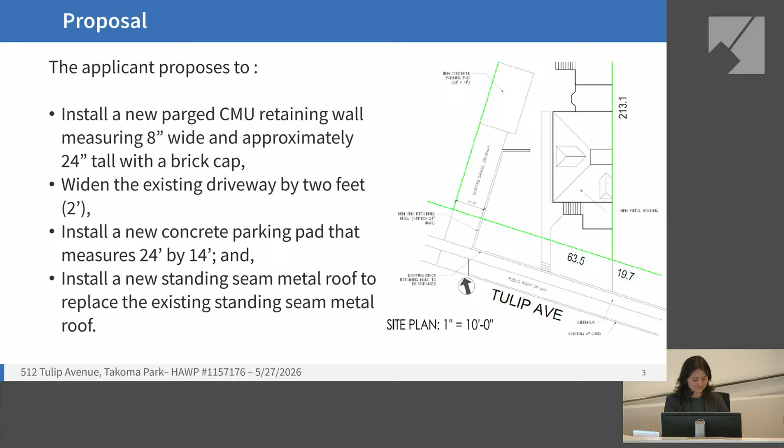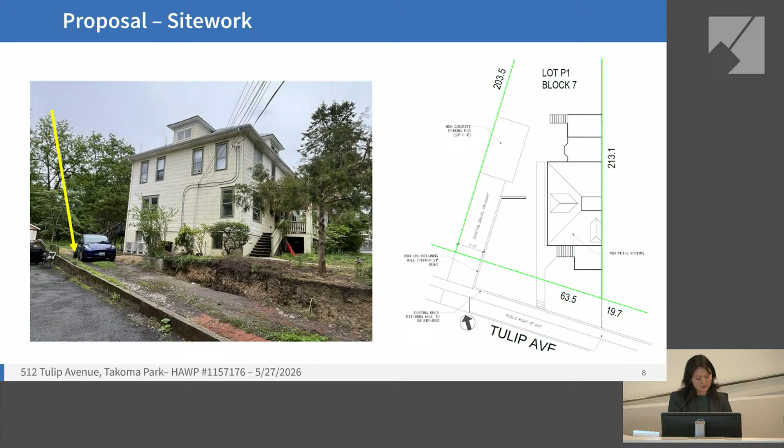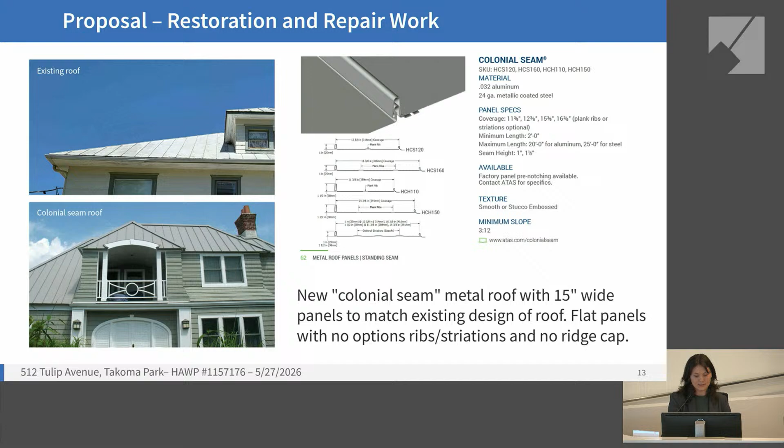The applicant also included some in-kind replacement and repair work as part of this application. They are proposing to remove the existing standing seam metal roof on their half of the duplex, as seen in the photo on the top left, and install a new standing seam metal roof. The existing roof has 15-inch wide flat panels with 1-inch tall standing seams, and the proposed roof will have 15-inch wide panels with 1-inch to 1.5-inch standing seams. There'll be no optional rib striations and no ridge cap.

Staff notes that the HPC does not typically review in-kind replacements or repair work. This work is not typically subject to HPC review per section 24A6, and that language is just up here. Homeowners are permitted to perform ordinary maintenance and in-kind repairs, although staff does appreciate the submission of specifications in advance to confirm that the proposed materials accurately reflect the nature, texture, dimensions, and details of the building materials as outlined in 24A 040101. Staff notes that this work is also eligible for the Montgomery County Historic Preservation Tax Credit.

Staff finds that the proposed site work is compatible with the character of the district per 24A8B and the guidelines. The hardscaping alterations respect the existing environmental setting and pattern of open space per the guidelines. Many of the driveways in the district and along this block contain wide private or shared driveways similar to the proposal. The retaining walls along this block are a mix of many materials,

and staff finds that the proposed concrete and brick retaining wall is generally compatible with the character of the resource and the streetscape. Staff finds that the new parking pad is also compatible and will not have a meaningful impact on the district, particularly given its setback from the street.

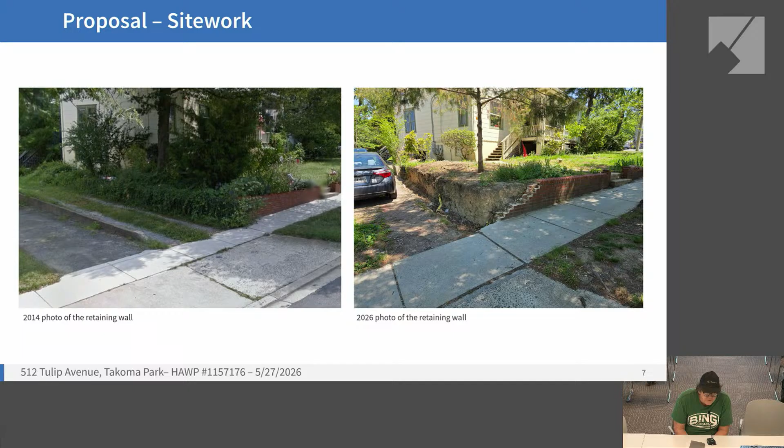I think maybe they'll be wanting to do permeable pavers. We could certainly ask them that, but I think they've made an attempt to mitigate stormwater. You're talking about 400 feet of concrete on a very small lot. Yeah, well, there are a lot larger driveways in the neighborhood. You just walk down the street, they're much wider driveways. So I think it's a reasonable request, and we can certainly ask if permeable pavers would be suitable for them.

In terms of the retaining wall, I think that's an engineering, a reinforced, 8-inch reinforced wall. It's not a very tall wall. Would certainly be capable of retaining that earth. I would not be so concerned about the brickwork, as there's probably suppliers that can, if they don't have the brick, find a very close match. I've done it many times as an architect.

How many cubes of brick have you laid, sir? Well, I can't say that I've laid cubes of brick, but that's not the point. The point is I've matched 50-year-old brick pretty darn close. So I think as long as they can find the brick that's in the right size and texture and color, they should be able to rebuild that successfully.

Sure. Go ahead. Commissioner Galway. Yeah, this is Commissioner Galway. First of all, thank you for your testimony. I think we have to be very careful, being a historic area work permit, and a lot of the things that you brought up, the lead, the concern with permeability, the ability to create that wall and how that was done, most of those things are not in our purview.

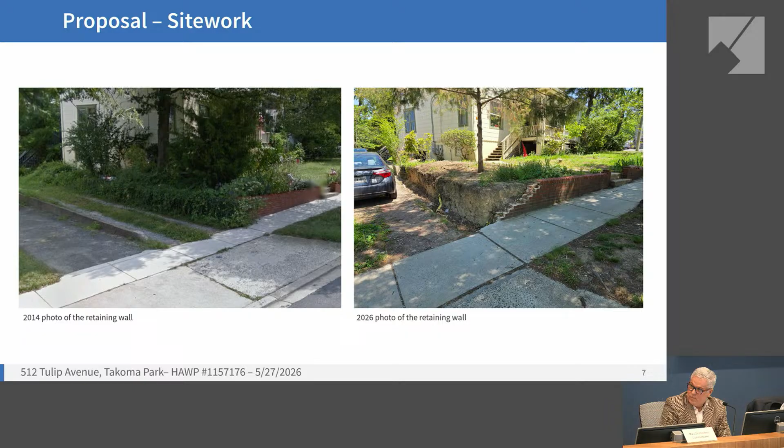If not, we appreciate your coming in and talking to us. Thank you. We'll certainly talk to staff about how we advertise our applications in the future and assure that neighbors are receiving the advertisements.

I can't address the roof issue because I don't have knowledge of the components of the roof. I haven't been up there, so I can't claim to know if there's lead or not. I would assume the permit process would require them to illustrate if there is lead, and how they'd abate it when they remove the roof material.

Does Montgomery County require a permit for replacing a roof in kind? This is Rebecca Ballo with the staff. Again, the Department of Permitting Services requirements are separate from the purview of the Historic Preservation Commission. We can certainly give you the website for DPS if you have questions about what other permits might be required for this submission. Again, sir, I can't answer that question, I don't work for the Department of Permitting Services, and neither does the commission. So I would direct you to their website if you have questions about other permits required for this work. Very well, thank you.

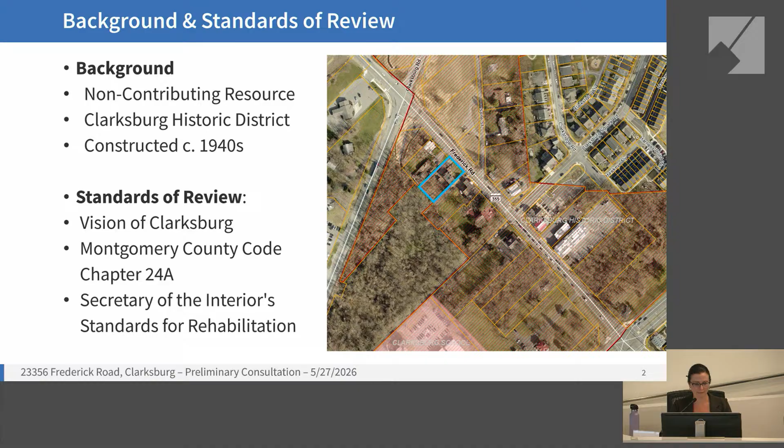This is a preliminary consultation review for 23356 Frederick Road, Clarksburg. The property features a circa 1940s Cape Cod house and is listed as a non-contributing resource in the Clarksburg Historic District. The project is subject to review under the Vision of Clarksburg, Chapter 24A of the Montgomery County Code, and the Secretary of the Interior Standards for Rehabilitation.

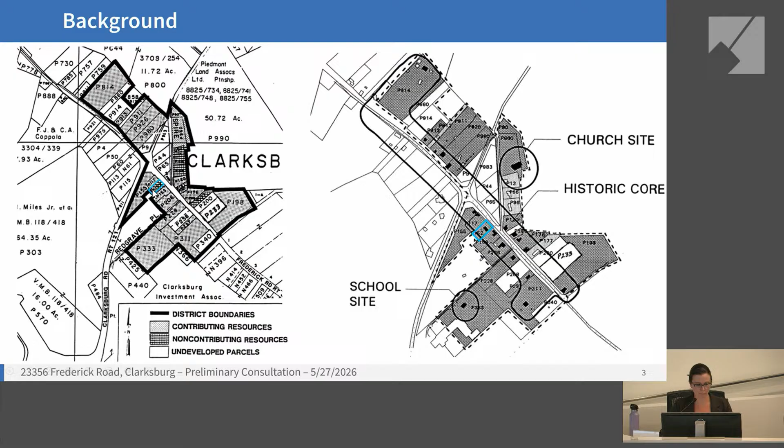The property is located in the historic core of the district between Spire Street and Clarksburg Road. A few existing conditions photos of the property: the existing house appears as 1.5 stories from the front and 2.5 stories from the rear, owing to changes in grade, which falls both from left to right when viewing the property from the front, and front to back along the property. For this preliminary consultation, the applicants seek feedback on a proposal that would ostensibly function as infill construction in the district.

The applicants propose to substantially demolish the existing structure, maintaining portions of the rear and side walls, extend the foundation and building footprint forward approximately 12 feet, and construct a 2-story addition with an elevated and occupied basement level. This would result in a building that is 44 feet 9 inches wide by 40 feet deep, with a total height of approximately 41 feet from the lower level to the roof peak.

The upper floors of the building would provide multifamily housing, while the lower level would be occupied by a commercial space. As part of the redevelopment of the site, the applicants also proposed to demolish an existing garage or shed building and to create a 20-foot wide paved driveway leading to a rear parking area, behind which would be located a new bioretention pond and associated stormwater management facilities.

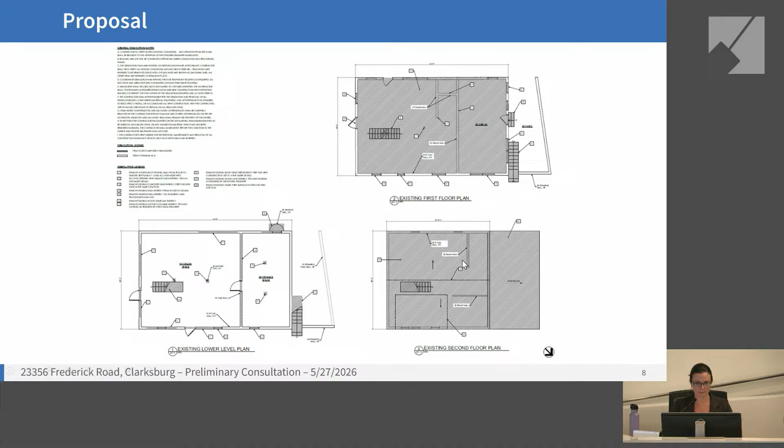Here's the proposed site plan showing the proposed footprint and site work in relationship to the neighboring historic properties. A more detailed site plan, existing floor plans with the demolition work shaded in gray.

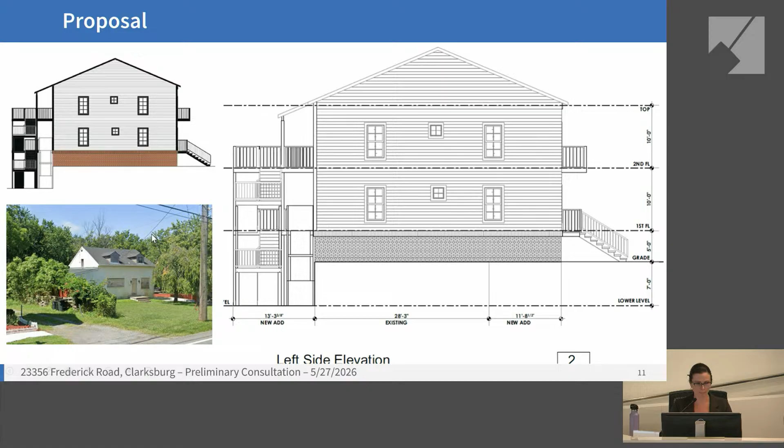Proposed first and second floor plans, proposed front elevation, the left or southeast side elevation drawing and rendering, and an existing condition photo from the public right-of-way. The right or northwest side elevation and existing condition photo from the driveway, and the existing rear elevation photo and proposed rear elevation drawings.

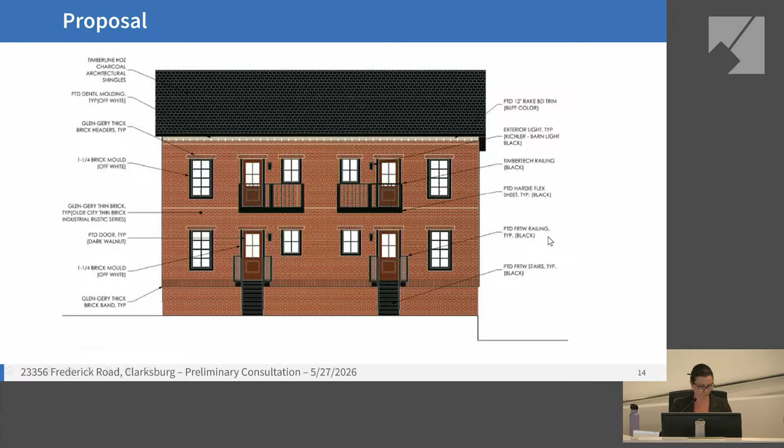Again, the front elevation and a bird's eye view of the property for some context. And from street level, the existing house is set back here.

Staff supports the overall concept of the proposal, namely the substantial demolition of the non-contributing resource and construction for new infill housing and commercial, but recommends substantial changes to the project design.

As a non-contributing resource, staff finds that the substantial alteration or complete demolition of the existing house and shed does not remove historic materials that characterize the property, in keeping with Standards 2 and 9, and Chapter 24A8B1 and D.

Staff further finds that the overall expanded building footprint of 44 feet 9 inches wide by 40 feet deep and resulting building setbacks are consistent with the footprint and setbacks of buildings in the Clarksburg Historic District. Staff finds that the proposed setback of 26 to 32 feet from the public right-of-way is consistent with or greater than neighboring historic properties.

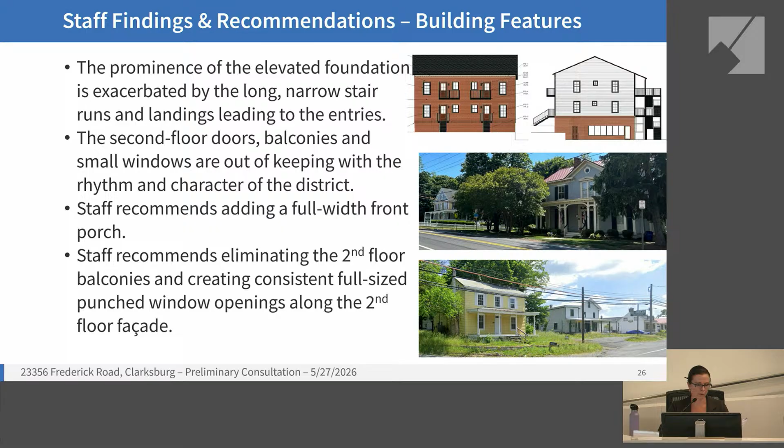Regarding materials, per the vision, the dominant building material in Clarksburg is wood clapboard or weatherboard. Staff finds the proposed thin brick cladding of the front facade is incompatible with the district and recommends that the front elevation above the foundation level be clad in horizontal wood or fiber cement lap siding, such as the Hardie lap siding proposed on the side elevations.

Staff also finds the amount of uninterrupted siding on the side elevations is out of keeping with the character of the district, and recommends the side gable ends be differentiated through a material change, use of a bandboard, or installation of gable end windows or louvered openings to reduce the amount of uninterrupted siding presented on the side elevations.

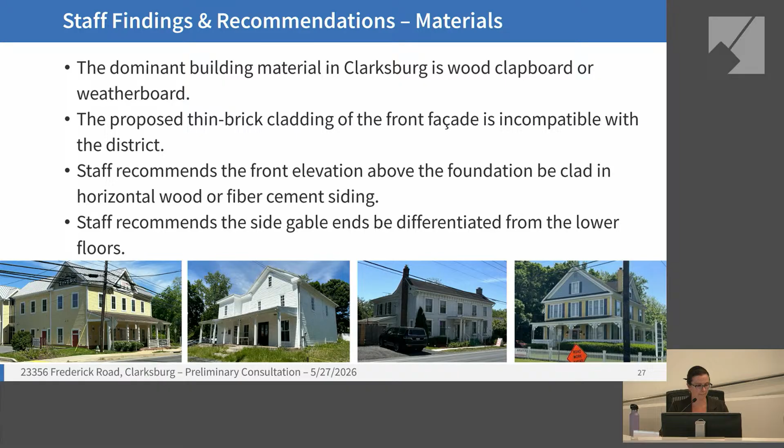Staff recommends that additional details regarding window and door reveals, trim details, and other features be submitted for a future preliminary consultation.

In addition to the building alterations, the applicants propose a new paved driveway with a parking area at the rear. New segmental block retaining walls would be added along the sides of the driveway owing to the changes in grade. Staff finds that while the proposal widens the existing driveway by a few feet, it does not introduce a new curb cut and will have a limited impact on the historic district, in keeping with Chapter 24A 8B1.

Staff finds that much of the proposed parking will be located behind the existing or proposed building, and that owing to the grade changes will be limited in view from the public right-of-way.

Staff notes that a proposed dumpster would be located at the end of the driveway before it turns behind the building for the parking area, and that this dumpster should be screened with fencing to be reviewed at the next preliminary consultation. Behind the parking at the rear of the parcel, the applicants propose to construct a new bioretention pond.

Staff finds that this area will have limited visibility from the public right-of-way, but seeks additional information on the requirements and associated landscaping. In summary, staff supports the overall project footprint, setbacks, and form, but finds that the project's height and architectural expression are incompatible with the requirements for the Clarksburg Historic District.

For this review, staff requests HPC feedback on the appropriateness of the scale, height, and massing of the proposed additions, the appropriateness of the proposed building design, the appropriateness of the proposed hardscaping and site work, and any other comments you might have.

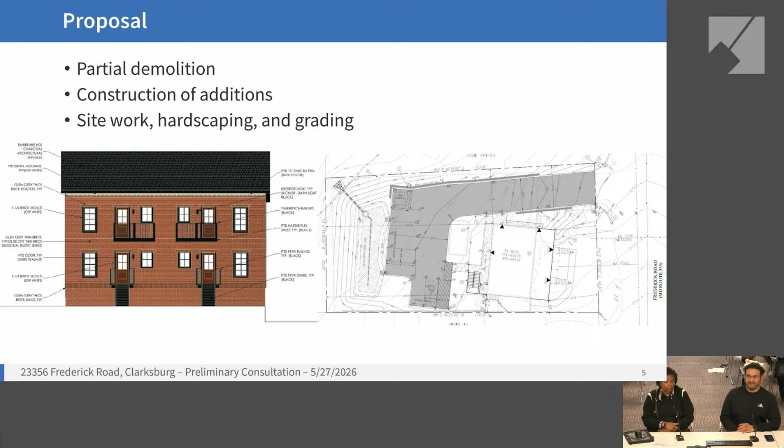Thank you so much for reviewing everything. I do have a question.

So we spoke with Laura in regards to adding a front porch across the facade. If a porch was introduced, would that give us any leniency for the height? Because now it would propose a presence that looks similar to the other buildings, even though it'll be a bit taller. Could we meet in the middle of that 30 foot 10 inches if a left to right porch was presented? Or are we hard on the 30 foot 10?

I only ask, I mean, we can bring some down for the lower level, but we would be confined to 8 foot ceilings in these apartments, and most apartments nowadays have taller ceilings than 8 foot. So we're trying to be in kind with what people would be interested in, which is why we increased the heights.

To add to that point, I think another part to consider is that the commercial space is pretty much on the back of the property. The entrance doesn't fall on the front of the road at all, so everything is on the back.

So when I checked with the county about the building height, that should not impact things, because it also impacts the operation of how the commercial space is going to be used if I reduce the height by a significant amount. We've done a lot of math and consultation before approaching this. I wasn't aware, but pretty much the bottom line is that as long as we stay within the height limits the county allows, we should be okay. That was the guidance we were following.

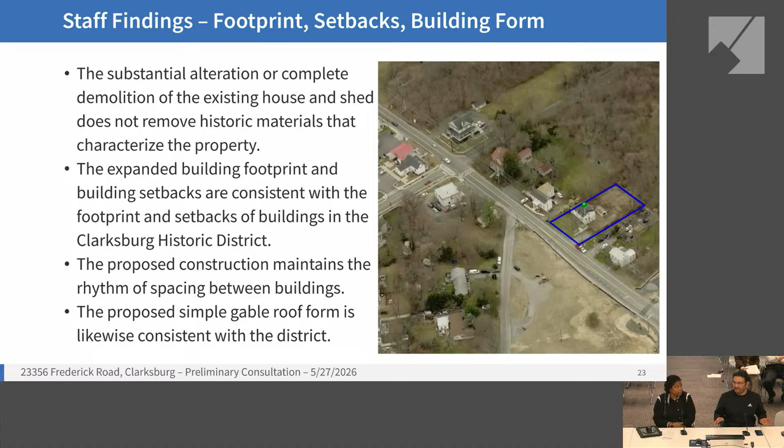There's a next door cafe called K2 Cafe, a gas station, and a tavern - three restaurants nearby. So we are going to comply with the historic district or conservation area requirements and not advertise too big. It's going to be a very cozy, community kind of environment.

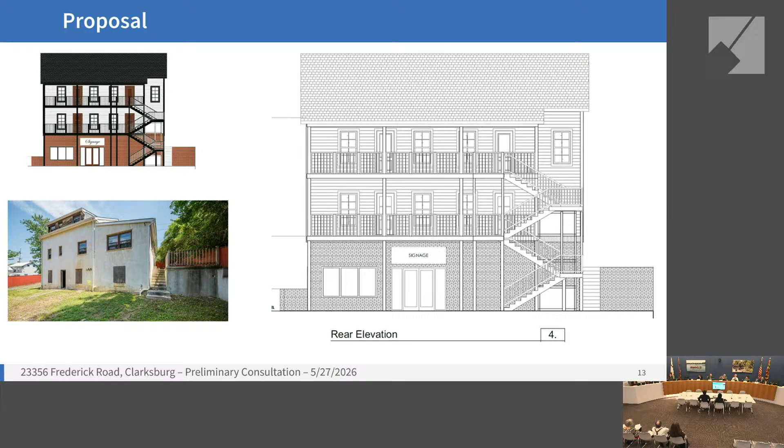That's what we are trying to create there. Okay, so we need information for that for next time. Would they have to apply for a separate HAWP for signage? This is Rebecca Ballo for the record - yes, they would have to apply for another HAWP for signage.

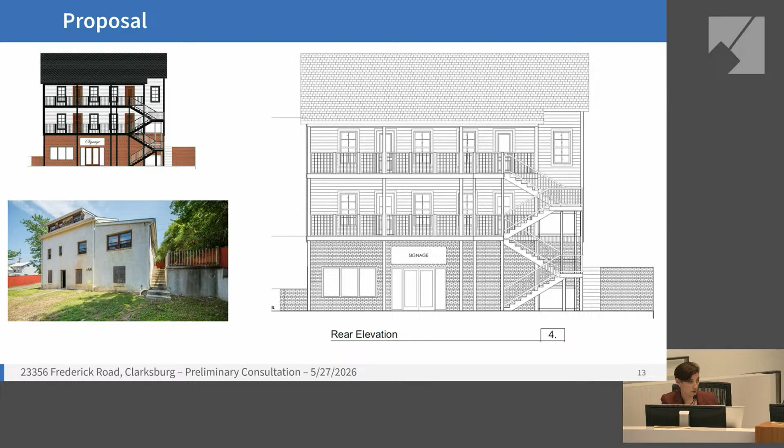Just for the commissioner's information, some of the images Laura showed in the presentation are also commercial buildings within the historic district. There are many commercial establishments within Clarksburg easily accommodated within the historic district design guidelines, and we don't regulate use per se. What we regulate is architectural compatibility, and that comes first - the use can't drive something architecturally incompatible. We don't have basement level commercial uses within the district, probably because they're challenging spaces to market and use, but we have very successful commercial spaces that exist typically on the first floor. So they would need a separate HAWP for any signage, just like other commercial buildings do.

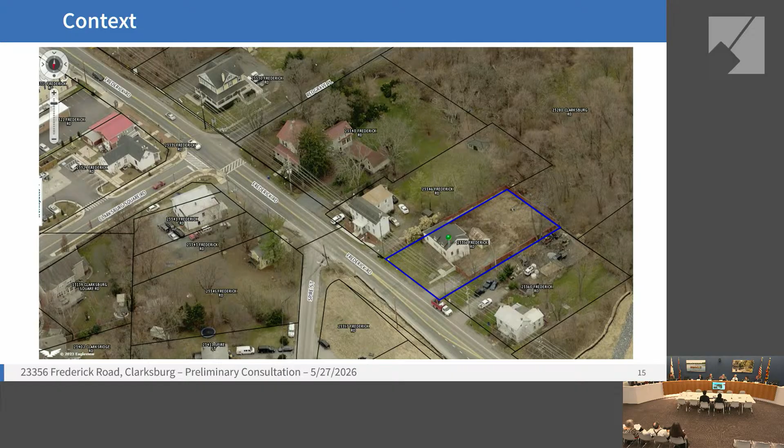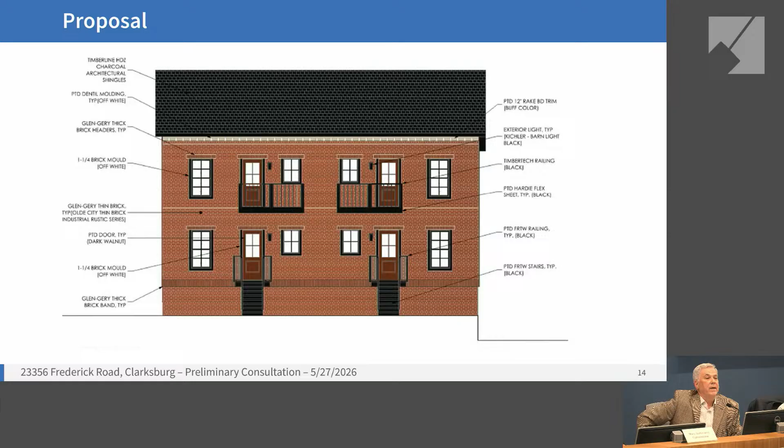Thank you for that. Other thoughts? I have one - the photos seem to suggest the grade is sloping down from the street to the back of the property. So why can't you just lower the building down, excavate, push that dirt downhill, and put a nice level terrace out there for your coffee?

No, that would also create a subdivision process altogether. The moment I start hitting the boundaries and go above a certain threshold, like trying to open anything beyond the existing 1,900 square feet of building, I would have to get into a subdivision or record platting process, which is about 2 years long. We've already wasted 1.5 years sitting on this property without any concrete movement, so that's why we are not planning to do that.

So you don't want to do stormwater management? No, we are doing stormwater management. I kind of didn't catch the reason why you can't lower the grade - I didn't understand, sorry.

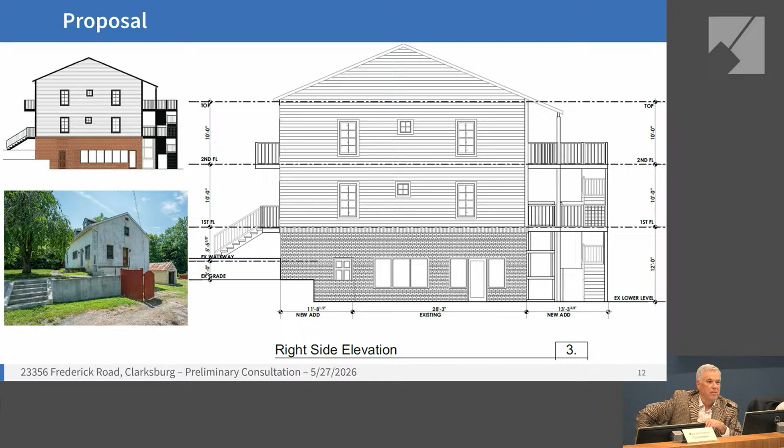This is Rebecca Ballo again for the record. The lot is unplatted. So the reason, for example, that the applicant is not demolishing the entire building and starting new is because if they were to do that, they would have to plat the lot and go through an administrative subdivision process with the planning board. There are a lot of additional requirements that come with that, so they're creatively approaching this so they do not have to plat the lot.

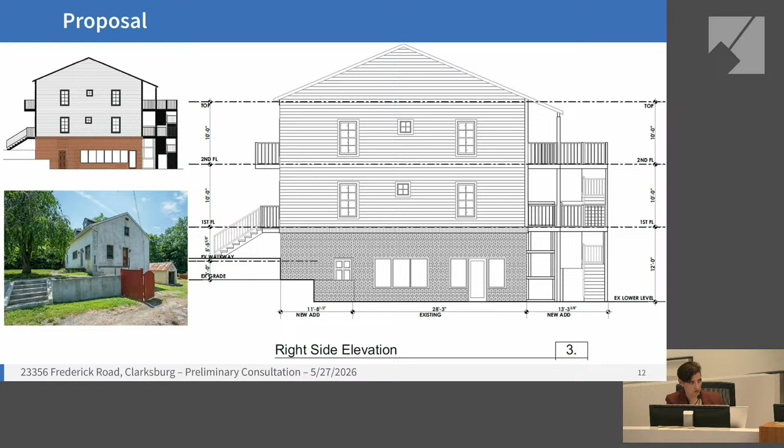Got it - so there's nothing in terms of site restrictions, it's the administrative burden they're trying to avoid, is my understanding. Yes, that is correct. Okay, thank you, got it. Thank you very much for that explanation.

Any other questions? Commissioner Dominiani, I have another question for you. I'll invite you for lunch for sure, once I'm ready with the cafe.

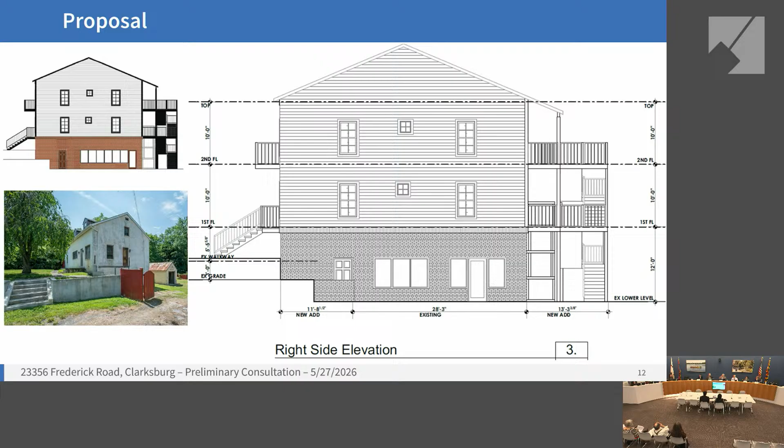This is a question about the front of the building. You've heard comments about this, and we're going to go into a broader deliberation about front porches and things like that. But in the drawings, it wasn't clear how you might be connecting that building, the front entrances, the sidewalk, the front stairs to the street, if at all. I know some of your neighbors have smaller front porches closer to the road, connected directly even to parking along Frederick Road. So the drawing didn't show that to me - I was hoping you could describe, if the drawing's not accurate, how you planned it.

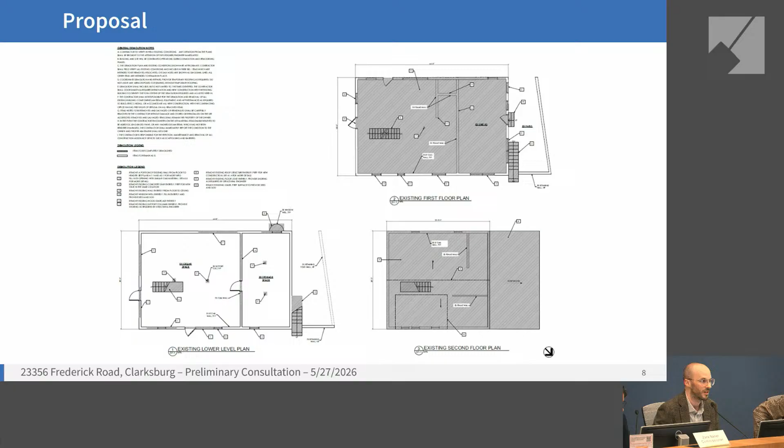Yes, the current lot - the property is way behind the current front road. All the properties on this line are pretty much very adjacent to the main road, like around 8 to 10 feet.

This property is unfortunately set back around 40 feet already. So even if we bring a 12-foot front, we still have around 30 feet of space over there, which is more than sufficient.

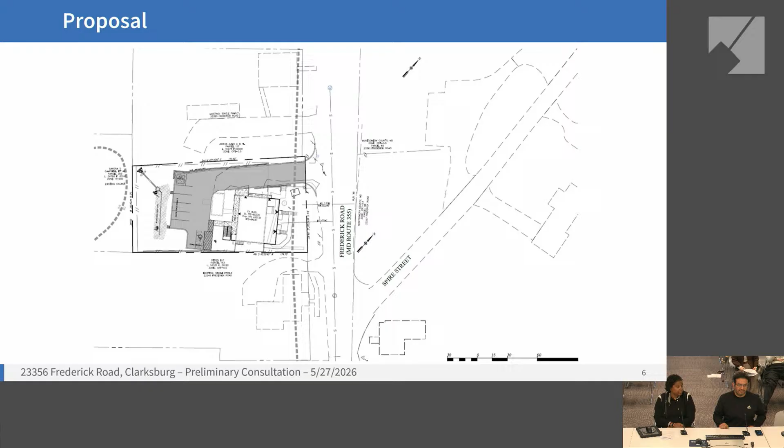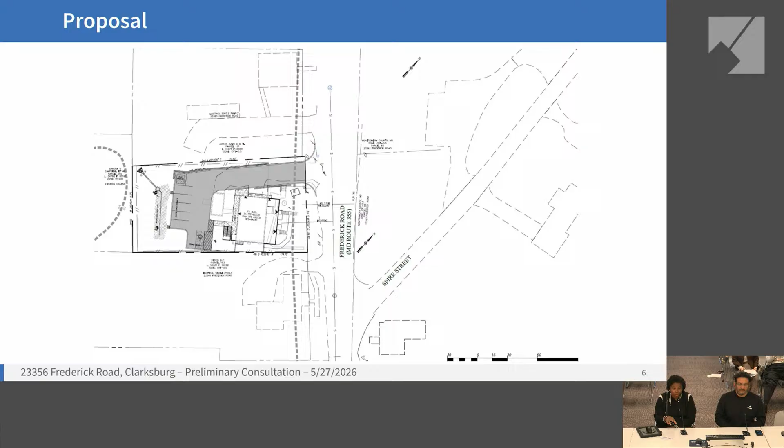So they'd circulate from the back, then up towards those front stairs, versus connecting from the road directly. You would come up the driveway, and then there would be a walkway to those entrances.

Okay, so the drawing a few slides back is accurate as shown? Yeah. Okay, to your vision.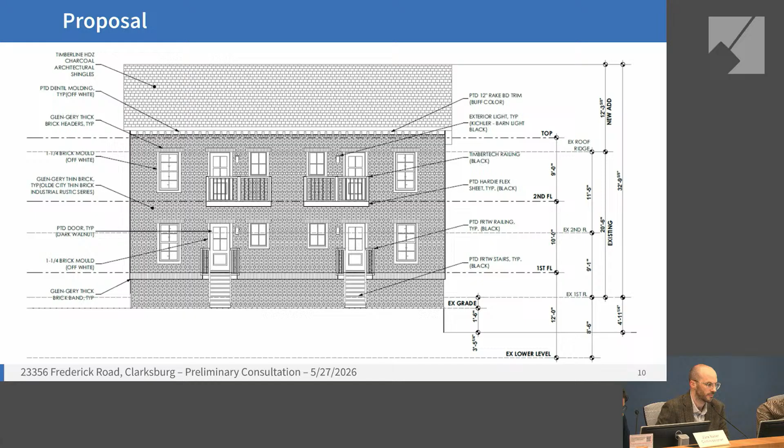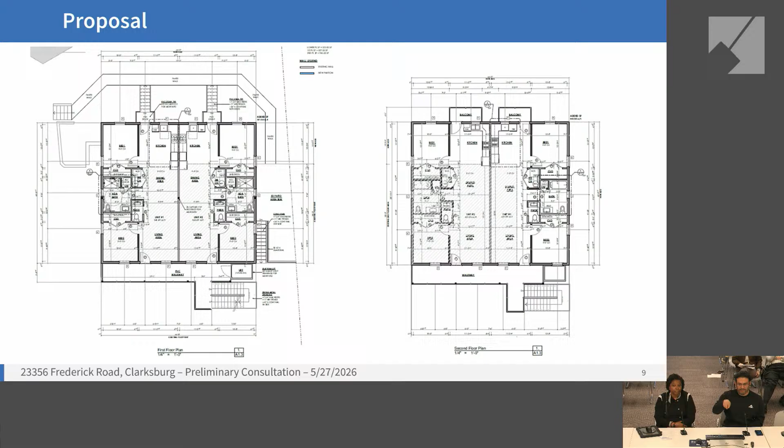Thank you. On this drawing, the stairs are connecting to those two sideways, and from the behind there is parking. So somebody can park on the back and then walk upstairs, and go also on the front if needed.

But all the entries for the multifamily are from the back. So basically the front is for just ease of access, you can say that. Okay, thank you.

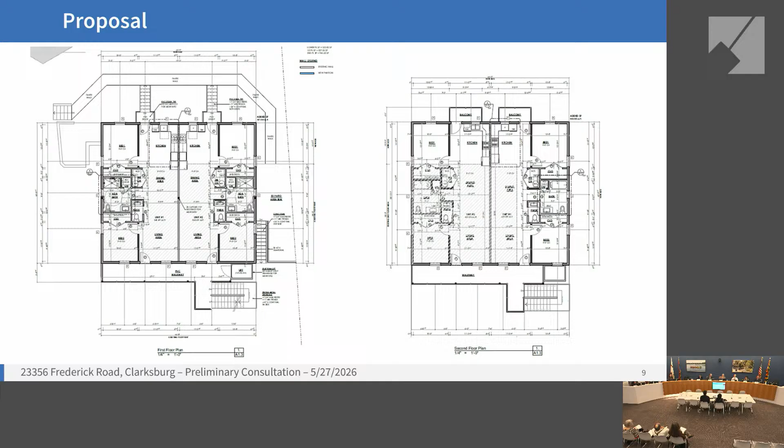If there are no further questions, then we will discuss and give you our thoughts. I'll kind of kick it off.

You mentioned that you've met with the zoning folks and you're meeting height requirements by zoning. Yes. And while technically you've met those requirements, the way the commission views how a building integrates into a historic district is a little different, and that considers the massing, scale, and height of the building. What the staff comments suggest is that we are looking to find that happy medium where your building is a good neighbor to the adjacent neighbors and fits in a sympathetic way to the overall streetscape and the historic context of Clarksburg, particularly the streetscape.

So at the moment, the design will feel very different, in that there's brick across the front facade, but then converting to siding. We don't see a lot of that in the historic district; we'll see it out in the newer developments. But that's a detail example — I think massing-wise...

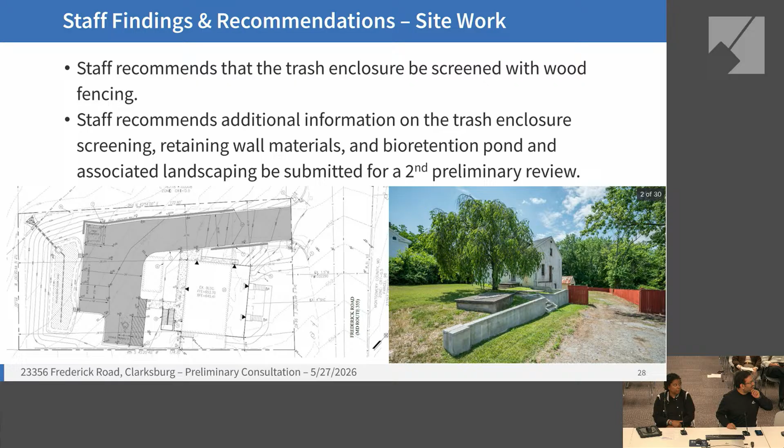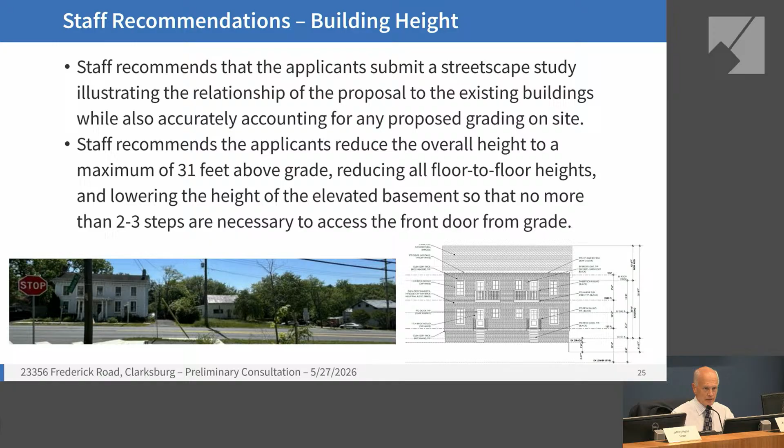I just want to add that the staff did a great job, and I think I'll follow what they said. I can't disagree with any of the comments staff had in terms of materials, massing, and the request for a streetscape study. I think they did a very nice job, and I happen to agree with all of their comments and recommendations. So I would say take a close look at that as well. Thank you.

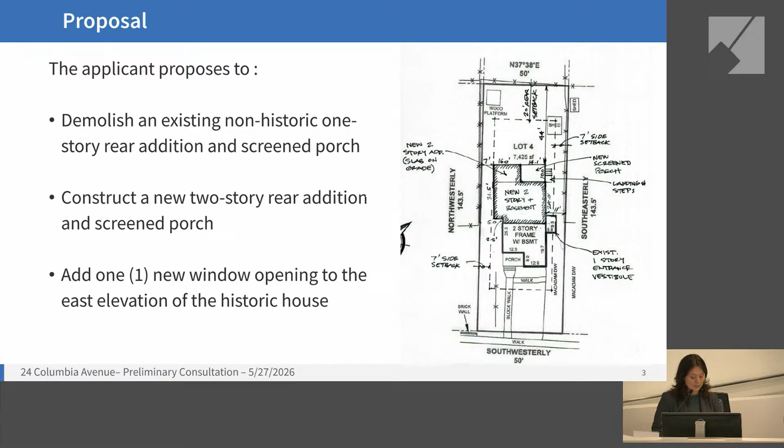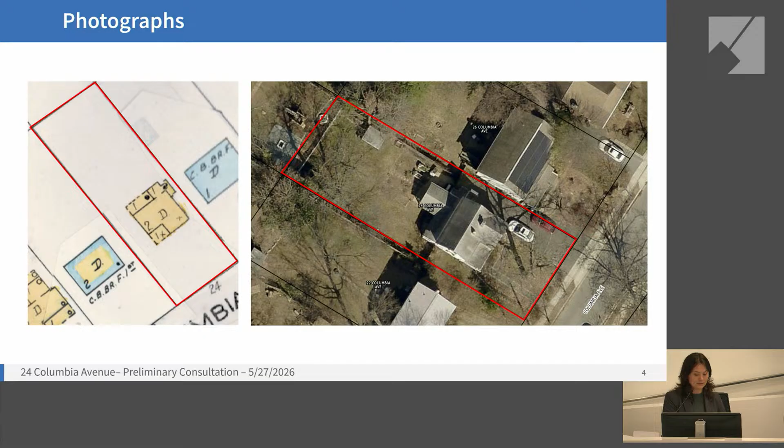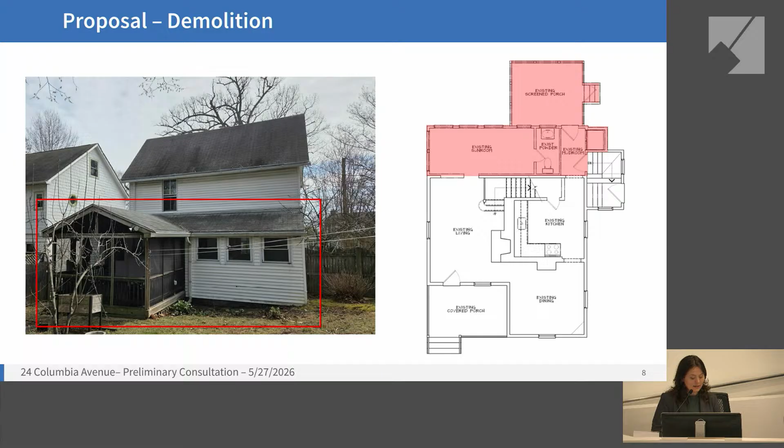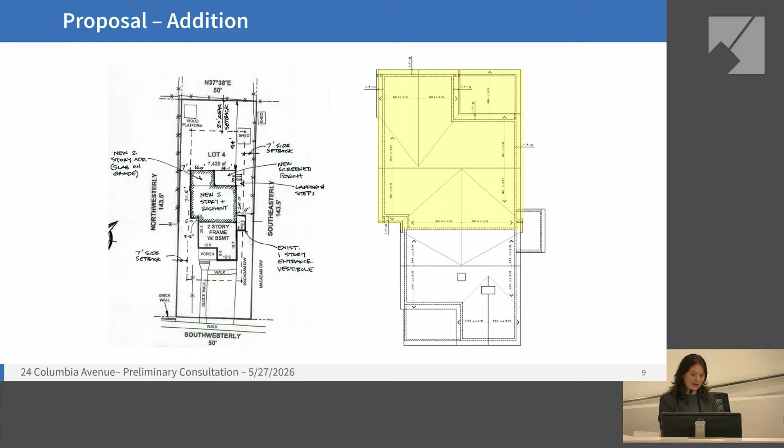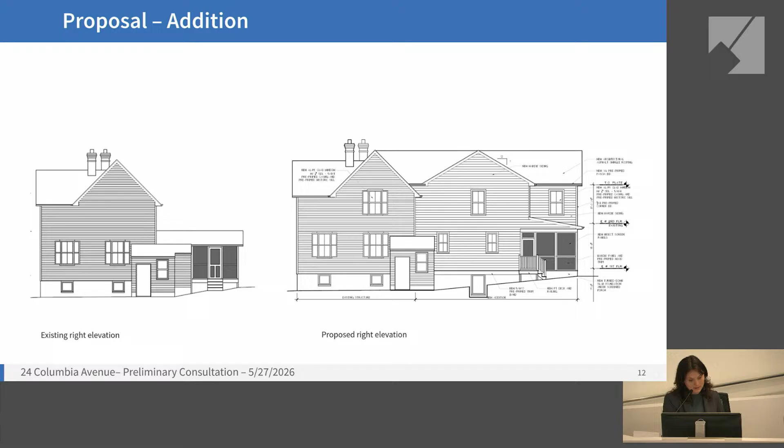Here's the left elevation, existing and proposed. The right elevation, and the rear elevation.

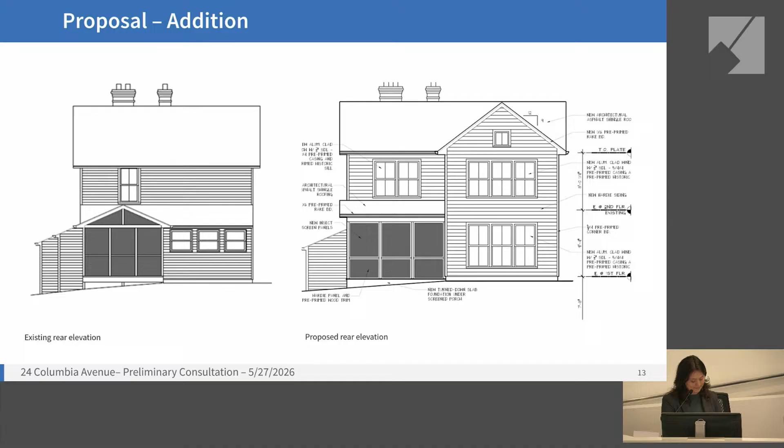The new addition will feature a cross-gabled roof clad in asphalt shingles, 2/2 aluminum clad windows, fiber cement lap siding, a one-story screen porch, and a new pressure-treated wood deck. And here are the proposed floor plans.

The applicant is also proposing to add a new window opening with 2/2 aluminum clad sash windows to the second story of the right elevation, which is highlighted in yellow here.

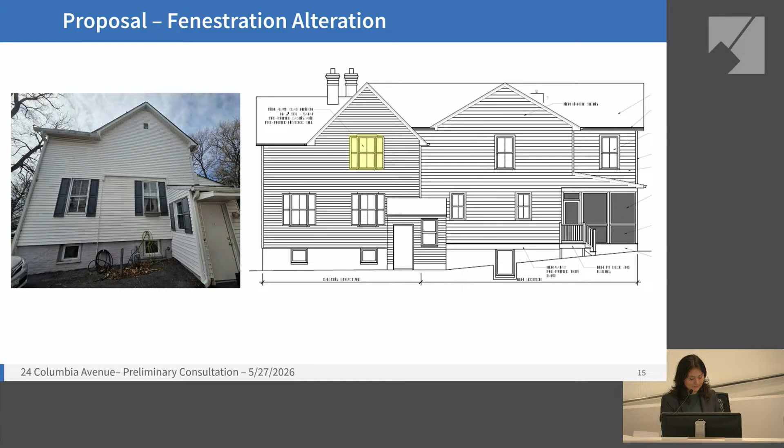Moving on to staff findings for the demolition: the rear screened porch was constructed in 2008, and the rear addition was previously a porch that has been heavily modified during its enclosure. Staff finds that it no longer retains sufficient integrity of design and materials.

Staff finds that the immediate rear of the property is not at all visible from the public right-of-way, and the guidelines dictate that alterations to features on contributing resources that are not visible at all should be allowed as a matter of course. Staff finds that the proposed demolition will not impact the character of the site and recommends that the HPC approve the partial demolition.

Staff is conceptually supportive of the applicant's proposal to construct a rear addition, but finds that the massing, as currently proposed, will overwhelm the small historic house.

The overall location of the addition at the rear is generally compatible with the character of the district per the guidelines, but staff finds that it will be highly visible from multiple vantage points due to its overall size and width, contrary to the guidelines.

The historic house is approximately 25 feet 5 inches wide and 25 feet 5 inches deep, with a footprint of approximately 646 square feet, excluding the shed roof addition on the right side and the one-story screened porch on the rear. The proposed addition will be approximately 30 feet 1 inch wide and 34 feet deep, with some carve-outs for the inset and the new screen porch.

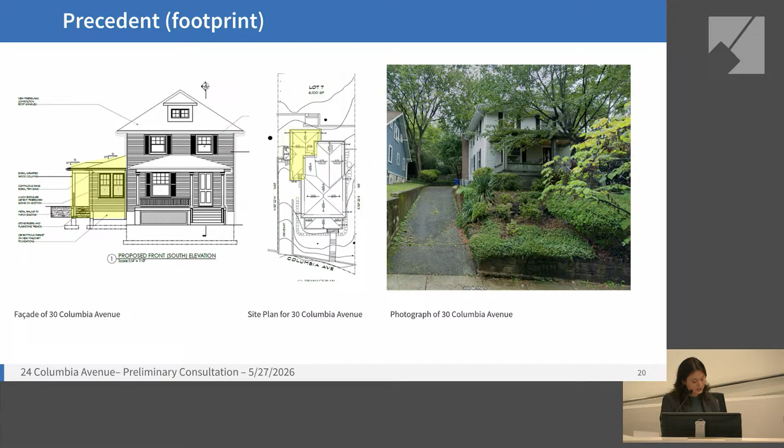The same year, the HPC approved the construction of a projecting addition at 7134 Maple Avenue with a similar rationale. The addition was also one-story, located primarily off the rear, and attached to a non-historic addition.

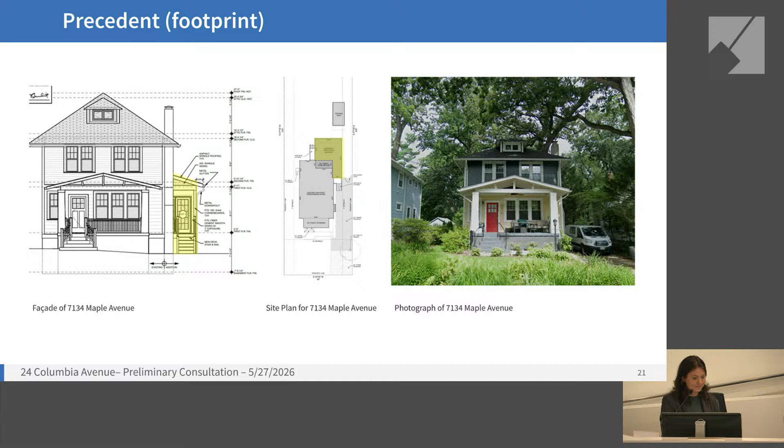Staff finds that the proposal for this addition on the subject property is markedly different from these two examples and lacks both the site conditions and design elements that would allow for the same kind of leniency. The proposed two-story addition will be the same height as the historic house and will not read as subordinate. Additionally, the house is located on a pretty flat lot, and the addition will be exceptionally visible from the street.

Staff finds the treatment of the footprint of the historic house is also not compatible per Chapter 24A8B2. In Takoma Park, the HPC has generally required that rear additions be inset from the wall plane of the historic house to differentiate the historic house from the new massing. Best preservation practice dictates that, when possible, additions should employ hyphens or insets to preserve the corners of the historic building.

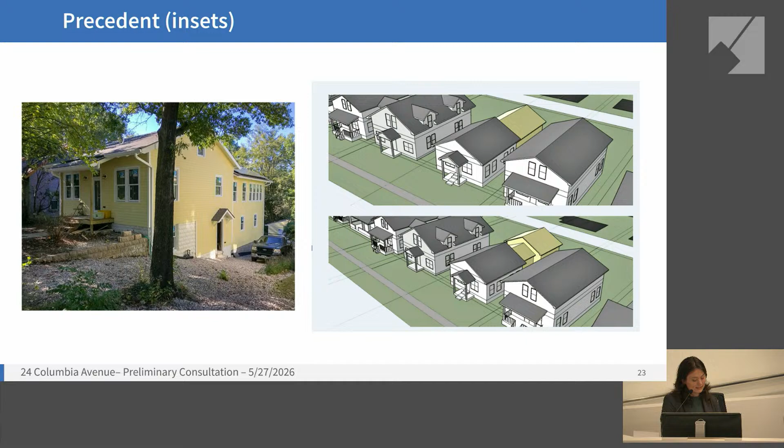And ensure that the historic footprint remains legible and distinct. In the past, the HPC has directed that these insets should be 1 foot in order to effectively distinguish the new from the old, although 2 feet is often ideal. In this proposal, the addition to the subject property is not inset at all on the right elevation, but is instead flush with the historic wall plane.

Although the new addition will be differentiated from the historic by the roofline and siding, staff is concerned about the loss of the historic footprint end of the corner and finds that the continuous wall plane reads too much like a single volume.

On the left elevation, the applicants are proposing a 6-inch inset. Staff finds that this inset does effectively retain the corner. However, it's not large enough to differentiate the old from the new, and it's only a few feet deep, so it doesn't do much to obfuscate the large massing of the addition.

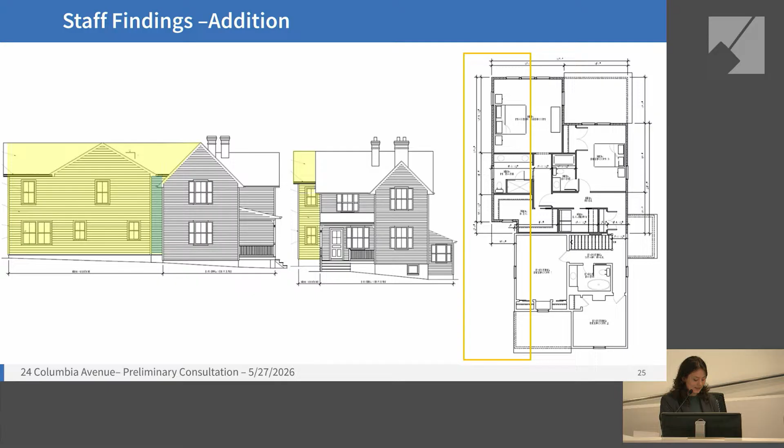Again, the HPC has, in certain instances, allowed for additions to be constructed flush with the wall plane of the historic house. In 2025, the HPC approved a rear second-story addition to 7204 Holly Avenue to be constructed in line with the historic wall plane. According to the staff report, an inset was the preferred treatment of this addition. However, leniency was given because the steep slope of the site restricted visibility of the addition from the right-of-way. Additionally, the new addition was shorter than the historic house and read as subordinate.

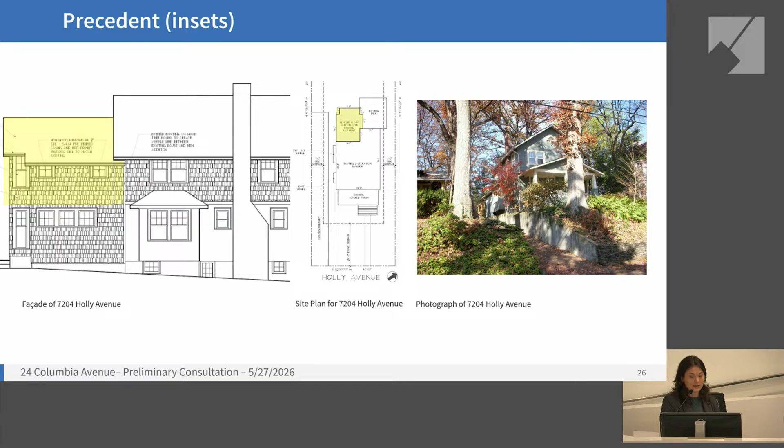So staff finds that the proposal for the addition on the subject property does not have any specific site conditions that support the same leniency. The lot is relatively flat, and the addition will be highly visible from the right-of-way.

Staff does find that the proposed fiber cement siding, aluminum clad wood windows, and asphalt shingle roof are compatible with the historic resource. Staff finds that the fenestration alterations are generally compatible and that this alteration is consistent with the predominant architectural style and period of the resource per the guidelines.

Staff recommends that the applicant narrow and shrink the footprint of the addition and add more effective insets. Staff also recommends that the applicant include a tree survey in their HAWP application.

And staff requests feedback from the HPC on the following: the appropriateness of the alterations to the historic building, including the rear demolition and the new fenestration; the appropriateness of the size and location of the proposed addition; the appropriateness of the height and massing of the proposed addition; and any other comments. That concludes the presentation, and staff can take any questions at this time.

Are there any questions for staff?

Commissioner Galway: Do we know anything about whether there'll be any tree removal? I haven't heard anything about tree removal, and I am suggesting that they include a tree survey in their HAWP. Thank you.

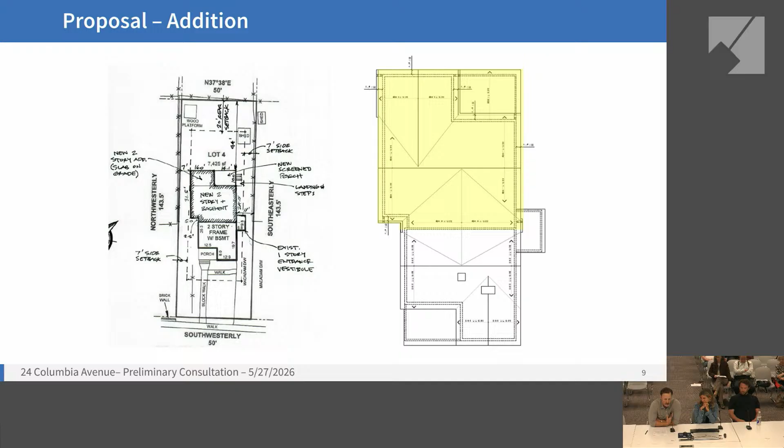I've gotten several of the projects you showed today approved, 2 stories and 1 story, going up the side. I want to specifically call out a 2-story addition I didn't do, but 512 Philadelphia was done with a massive side addition. I brought pictures of that, it'll come up here. So the whole left side of this project, and this faces Philadelphia, they didn't put windows on the front where the side addition is. That whole left side is on the side of the house, not even behind it, on the side of it. And it's 2 stories, it's big.

So I don't think we're out of character with the neighborhood in allowing that. That's why we went out just 5 feet.

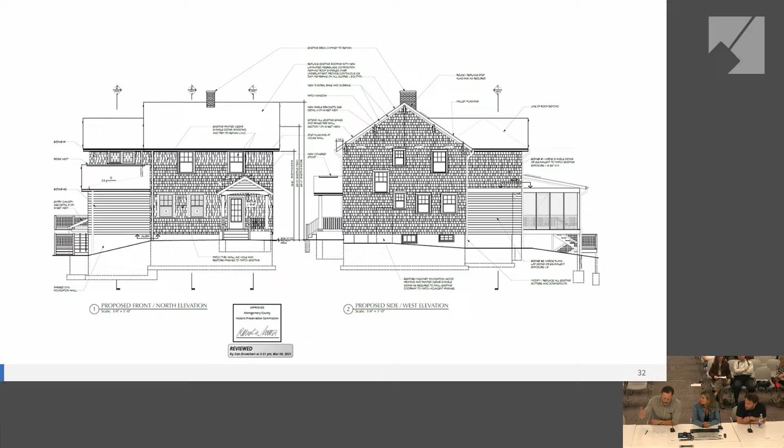To start with, let's go to the right side of our house. The reason we're flush on the right side is because our stairs are right there, and the landing is exactly 3 feet. This is an old, nice staircase in this house. We don't want to rip out the stair. So if I inset a foot, I can't get into the addition from the top of the stair. I'd have to rip through a bedroom and just ruin a whole bedroom just to get to the back of the house. So my ask is for a way to help solve this issue where I have 3 feet on the top of the stair to get into the rear addition.

So the existing house was there on the first floor, we're just extending it up, and there's precedent for allowing that. We did that on 7204 Holly, went directly above the addition. Even though we're tearing down the addition, we're still rebuilding it in the same spot.

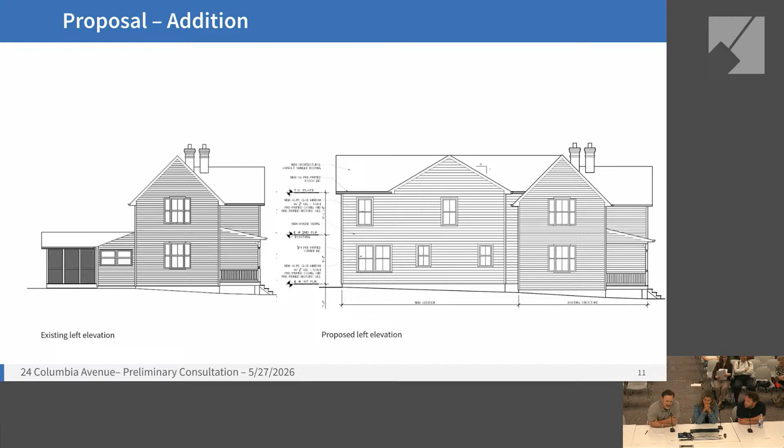We're also 35 feet back from the street. This is not 25 feet back from the street, we're extra far back. I don't think you see the front or the back of this house as much as you'd think. It's also up on a hill, so as was said when we started, the backyard isn't really viewable from the street. We're back another 35 feet, and the house itself is another 20 to 25 feet deep.

So this addition is 63 feet back from the street. That's the minimum for an ADU, that's how far back we are. We could build an ADU 60 feet from the front street. So I think we're far enough away that you don't really experience the back of this house. I think it starts to just disappear.

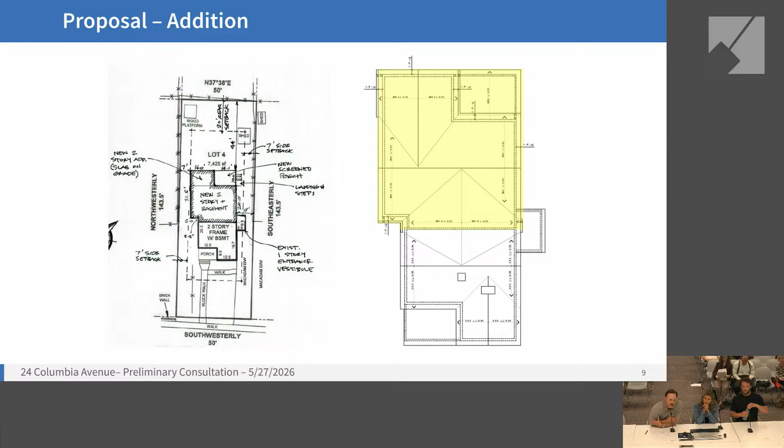So it's very hard to see this, and I think eye level, this is way above eye level. There's no way you're standing on the street in this perspective view, you're up high. This was taken from a high camera or something, not taken from the street. So I don't think our addition is dominating the street or overly massive.

We added a 6-inch hyphen space on that left side so we could see the original gable and not clip it, so we moved it back 6 inches. I'm now hearing a foot or 1 or 2 feet is the requirement. I've been doing 6 inches a lot, I can't remember the last time I did a foot. I did 3 houses on Maple in the last 4 or 5 years, all with 6-inch offsets. So I'm shocked to hear 2 feet, but we're preliminary, we can work with that.

Yeah, I mean that's pretty much it. Obviously we can talk about the roof height and everything. We're just trying to have an 8-foot ceiling on the second floor. It's a small house. The addition isn't that big for a regular house in this neighborhood, it's just that the main house is so small. Before I forget, 134% of the main house was the criteria. That's also a new one.

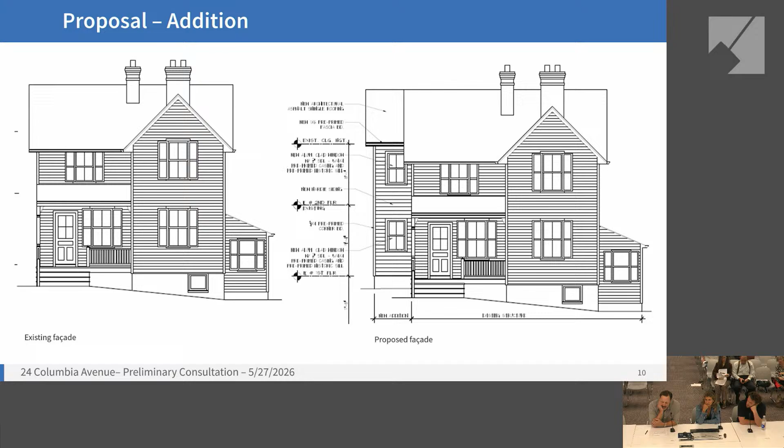7110 Sycamore was shown by the staff as an example. I designed that house - that's 110% of the footprint of the main house, so you allowed that to be bigger than the main house. So it's kind of weird that now there's a requirement that you can't go more than 100. Anyway, that's it, that's all I got. I'll let you guys take it from here.

Can I add one thing really quick too? On the first floor of the house there's a fireplace, and keeping the staircase and keeping this fireplace too really minimizes the useful space in the historic part of the house. That just cuts into the livable space there. Like that entrance room you come in, you can't really even use as a room.

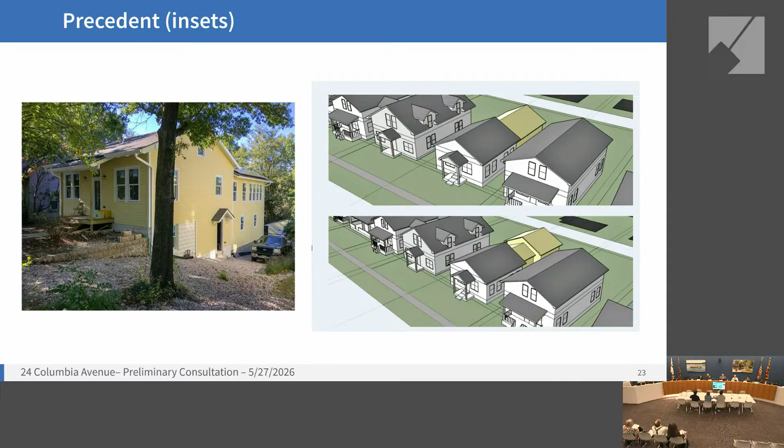Thank you. Questions for the applicant? Everybody's thinking hard.

I'll kind of give some questions. I don't think we're saying, at least from the HPC perspective, that there's a limit on the square footage in terms of what percent over the existing. We're not saying that - just let's clear that up. It is a tough puzzle because the house is so small, but I do think there are some things you could do to reduce the apparent scale of it without changing the square footage, or with minor changes to the square footage. So we'll talk to that in a little bit.

Are there any questions for the applicant before we start feedback? No? I'm sure they will think of some.

I think part of it - I went out there this morning, walked around, up and down, across the street. When you're across the street, you see a lot more of the back than that photograph that was shown, which was the sidewalk closest to your house. But when you're across the street, you get a deeper view back. So with no vegetation - and that's how we look at projects, as if there's no vegetation - you'll have a pretty good shot of the side view. You certainly have a good shot of the street, the driveway side of the house.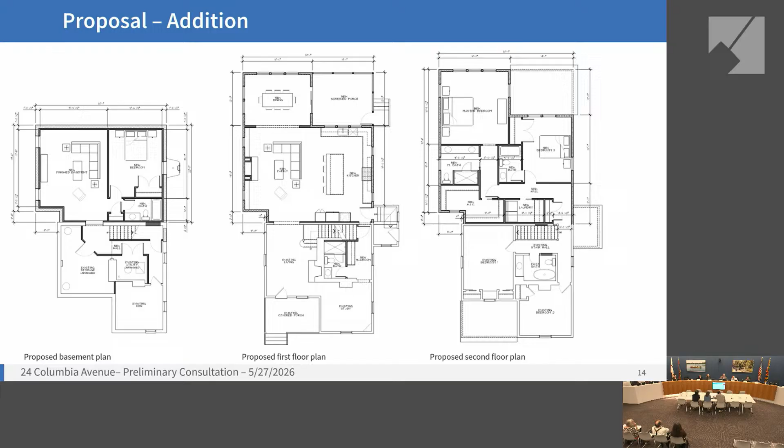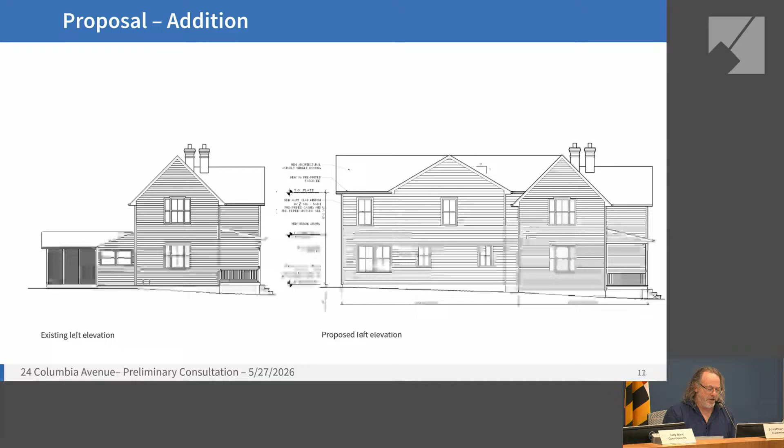I'm just, looking at those photos we saw, which aren't from across the street, I guess I kind of interpret them differently because I see blue sky and I'm picturing a house there. This addition would make it a different house—it's not the same house. I think staff used the word overwhelming, and it is overwhelming the house. It's just too massive.

If you're going to maintain the flush addition on one side of the house, it kind of allows you to go in a little deeper on the other side. This five-foot extension beyond the elevation, I think, is going to read as massive. One thing you might do is make the addition narrower where it comes in contact with the house, and maybe extend it past the elevation further back—I've seen that done where it reads almost as a different structure and doesn't crowd out the original.

Another thing that might help: right now the height of the addition is even with the side gable roof. If you brought that down to be even with the front-facing gable, it would be a little more subservient—you wouldn't have the whole house just extending. Just like it is in the front, you could have it a bit lower, and I think that would help too. But whatever the solutions are, I agree with staff that it changes the house altogether the way it is right now.

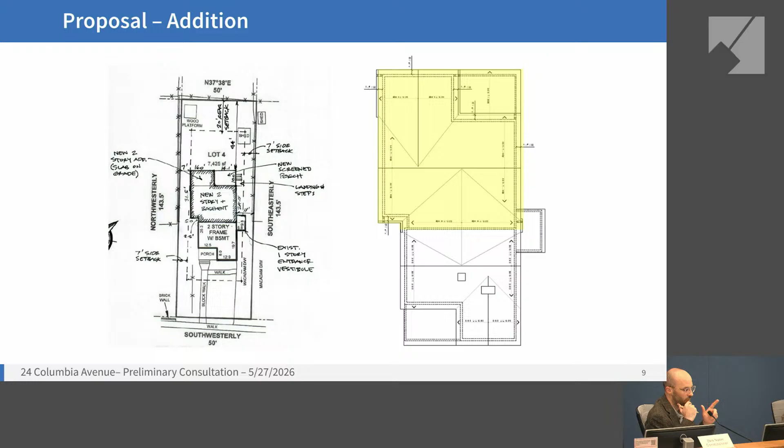But I think there might be some creative ways to flip where the small bedroom's bathroom is located, maybe where the laundry room ends up being, where the closet ends up being, the large master closet. And you've got quite a bit of hallway there. Reorienting a couple of them, condensing a bit, might buy back some space, which will allow you to narrow the addition's protrusion rearward.

This may have come up during a previous application tonight, maybe you heard. There was a proposal that we could think about bringing the ceiling height down on the corners of closets or the edges of bedrooms, accommodating a roof line above it also coming down in height. I think reorienting a couple of the smaller secondary rooms upstairs could accommodate such a thing, lowering that height in the closet or perhaps in part of a bathroom there.

So anyway, something to consider. I know it's densely laid out, it could be difficult, but some of those things might allow you to fit a hyphen in and then ultimately narrow the width a little bit.

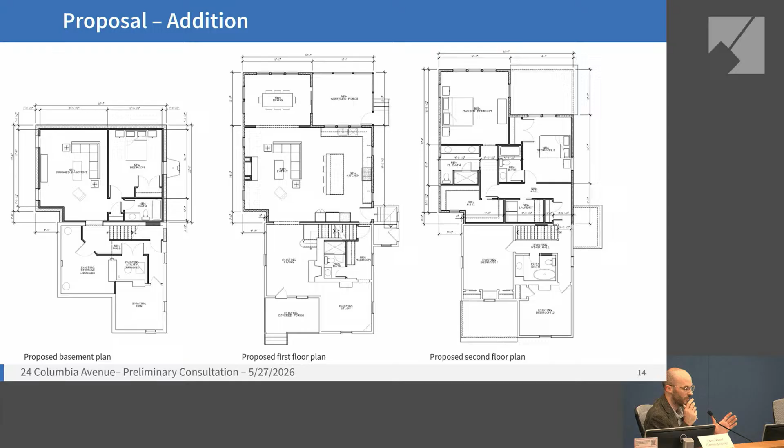I think some of the other things that we had been requested to react to on behalf of the staff include the appropriateness of the fenestration of the addition, among other things. I think the windows look great. You noted here and there where there would be shutters to match.

And I think the most important thing for me is where there's going to be a wall plane continuing along where the historic wall was to the new wall, to have a separation of some kind. We've seen, I think you've done before, a bit of a board or batten or something in between to differentiate the two. If we're not going to preserve that historic corner of the house, we want to be able to read what was original and what's new.

So you seem to be wise to that, but I just want to make sure that's part of the plan too. Materials and details end up mattering a lot when we're adding such a big addition to a small house. So yeah, that's all I have to say. And thank you again.

Commissioner Nazar: I don't have much to add, but I agree with all the comments other commissioners had. I understand the constraints on the right side, but I think you can easily grab at least 1 foot 10 inches, or about 2 feet, on the left side without much compromise, and still have a very nice functioning restroom and master bedroom. That includes adding to the hyphen. I think you can easily add another 6 inches, and it won't damage your plan, or force you to redo the layout.

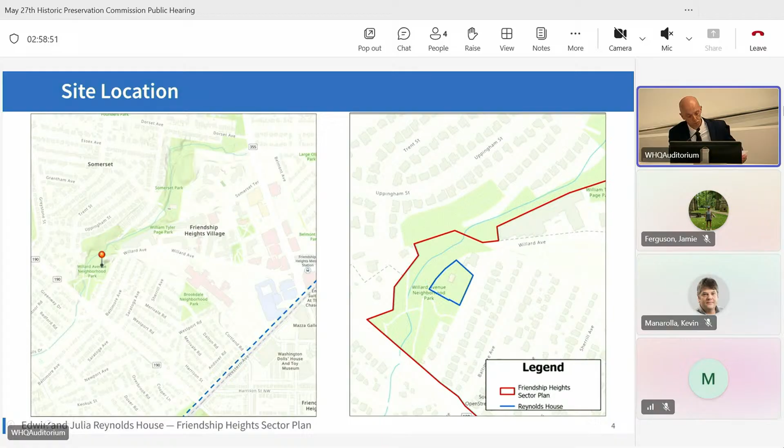Resources listed on the Master Plan for Historic Preservation must meet criteria for historical and cultural significance or architectural and design significance. The designation process includes hearings at the Historic Preservation Commission, Planning Board, and ultimately the County Council. Tonight's public hearing is the first step in that process, and there will be additional opportunities for public input as the recommendation moves forward.

So the Friendship Heights Sector Plan is a comprehensive update to the 1998 plan. It envisions improved connectivity, new public spaces, and additional development to strengthen the local economy and expand housing and amenities in Friendship Heights. The Reynolds House is being evaluated as part of this broader planning effort.

I'll begin with a brief architectural overview of the Reynolds House. The Reynolds House was constructed in 1899 and designed by Charles H. Kelly, a builder and relative of the Reynolds family. It reflects the Queen Anne style, which was common in the late 19th century and often characterized by features such as asymmetrical forms, steep roof lines, and decorative detailing. By the time this house was built, the style was already transitioning towards more restrained ornamentation, which was reflected in this design.

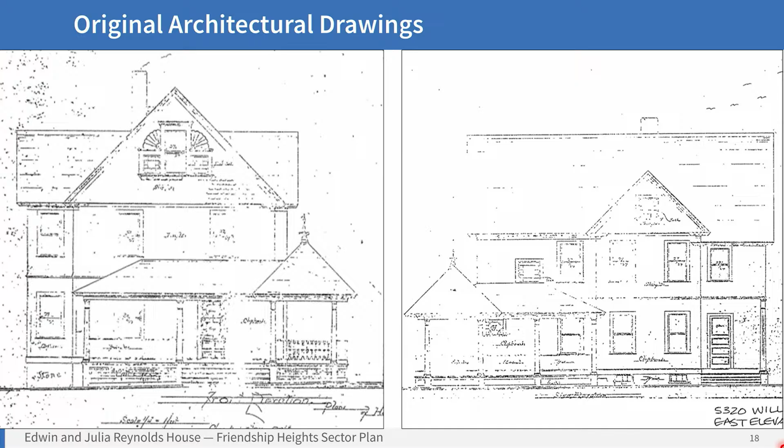So in 1899, the Reynolds secured a mortgage to construct the subject house on that parcel gifted from the Shoemakers. They hired their uncle, Charles H. Kelly, a builder, to design the house shown on the slide. These are the original architectural drawings prepared by Kelly. The design included typical elements of the Queen Anne style, but certain features such as the conical porch roof were omitted, likely due to cost, according to the family.

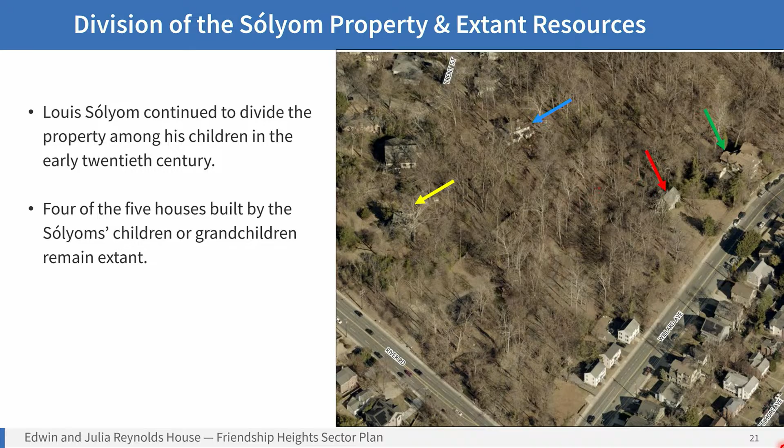By the mid-20th century, the area had changed significantly. This 1953 map shows the infill of previously undeveloped land with single-family housing. Again, the red arrow points to the Reynolds house.

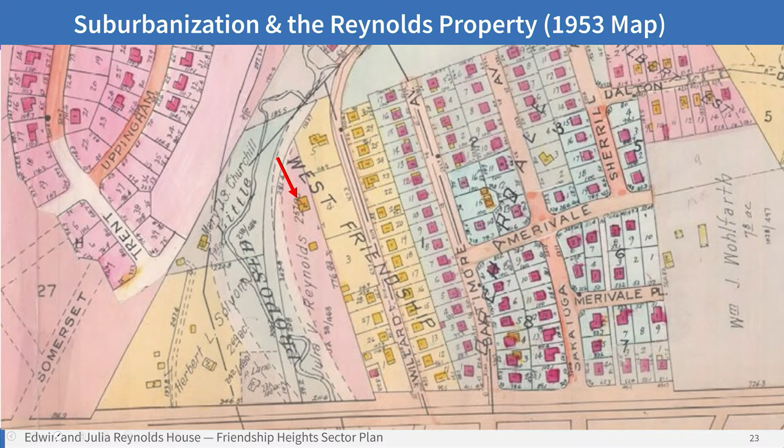Beginning in the 1970s, MNCPPC assembled land to create what is now Willard Avenue Park. Park improvements have led to the acquisition and demolition of several buildings as part of the park development program. In 1995, the Planning Board approved the acquisition of the Reynolds house and surrounding property for inclusion in the park, not for its preservation. Montgomery Parks subsequently added the Reynolds house to its rental portfolio, with demolition anticipated at a later date.

I'll now move to staff evaluation of the Reynolds house, beginning with a brief overview of earlier findings. In 2009, an architectural historian under contract with Montgomery Parks' Property Management Section completed the Montgomery County Department of Parks Cultural Resource Stewardship Section Finding of Eligibility form for the Reynolds house. The study found that the property met 4 designation criteria for listing in the Master Plan for Historic Preservation.

This preliminary analysis was concurred with by both the Montgomery Parks Cultural Resource section and the Montgomery Planning Historic Preservation section.

Today, the Historic Preservation Division finds that the Reynolds house reflects development along River Road prior to its suburbanization, offering insight into the area before the development of Friendship Heights. As the oldest of 5 houses built by the descendants of Louis and Sarah Sólyom, the Reynolds house stands as a testament to the enduring success of the family and their presence along Little Falls Branch for 150 years.

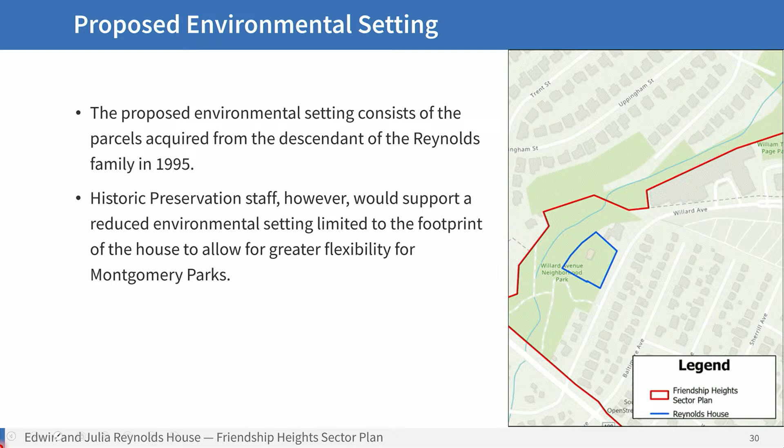Finally, I'll outline Montgomery Planning's recommendation as it relates to the sector plan and tonight's action. As part of the working draft of the Friendship Heights sector plan, staff will recommend designation of the Reynolds house in the Master Plan for Historic Preservation. This means that staff's recommendations at the Planning Board will be consistent with the recommendation being presented to the commission tonight.

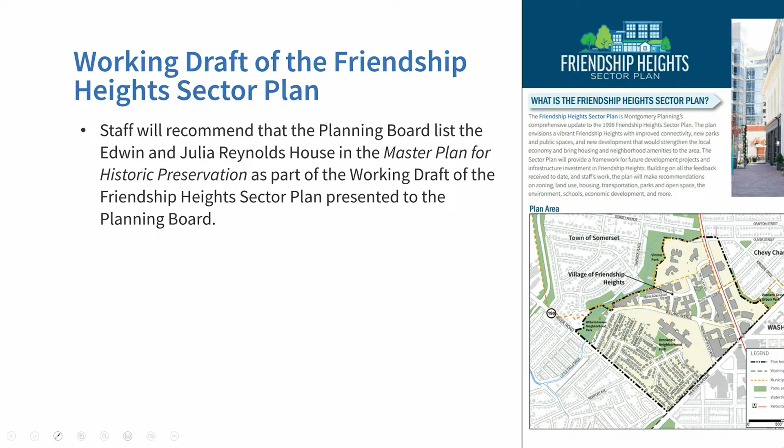In summary, staff requests that the commission take 2 actions. First, find that the Reynolds house meets 3 designation criteria under the county code. Second, advise the Planning Board to recommend the county council amend the Master Plan for Historic Preservation to designate the property as a historic site.

Of note, the commission received 7 letters of support for the designation from interested parties, and the property owner, represented by Montgomery Parks, objects to the designation.

For next steps, Montgomery Planning will be providing an update to the community on the entire working draft in June. The Planning Board will then consider the draft later this summer. The public hearing will not be scheduled until after the August recess of the Planning Board. I'm happy to answer any questions.

Do the commissioners have any questions for staff? No?

Thank you for that wonderful presentation. There are no questions by the commission. We will start our public testimony, and we will start with folks from Montgomery Parks, Cassandra Michaud and Christy Ciabatti.

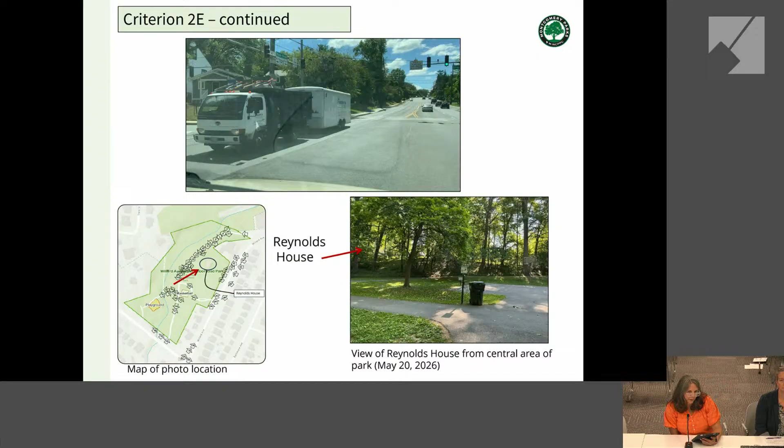Yeah, there you go, perfect.

This video shows that the house can barely be identified visually even when passing by it directly on the road. While the house retains its basic architectural form, it is a typical example of a common style of dwelling and not a rare or distinguished resource. Its setting has been substantially altered by later suburban development, limiting its ability to convey that original context.

While the excellently researched and presented designation report presents a compelling history, for the reasons detailed above and in our submission, we believe that Reynolds House does not meet any of the criteria for designation, and we respectfully request a recommendation against. Thank you for your time and the opportunity to present.